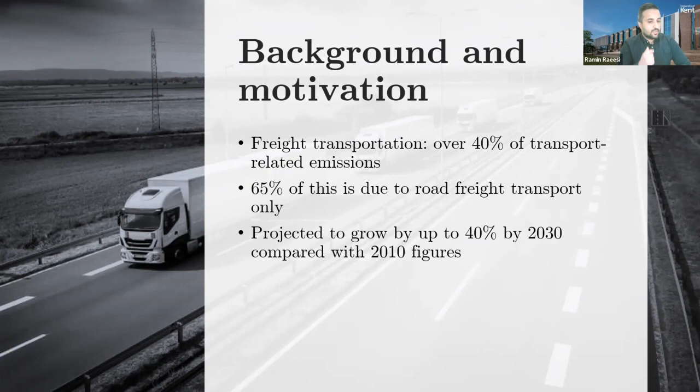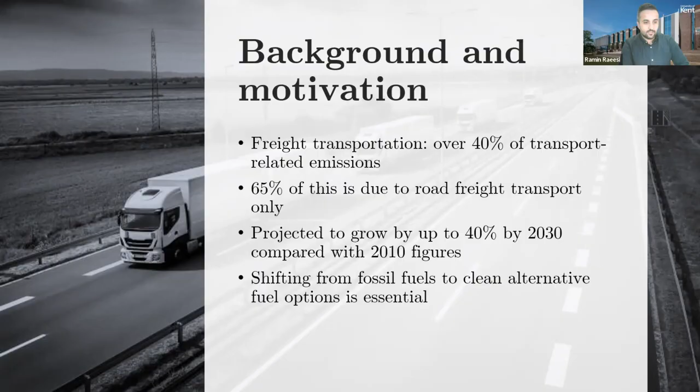I'll start with a little bit of background and motivation for carrying out such research. Freight transportation accounts for more than 40% of transport-related emissions, and 65% of that is due to road freight transportation alone, which is a really large figure. Between 1990 and 2010, heavy goods vehicle emissions increased by around 36%, and they are projected to grow by up to 40% by 2030. So shifting from fossil fuels to clean alternative fuel options such as hydrogen is an essential step in decarbonizing the road freight transportation sector, which has the lion's share of total emissions from the overall transport sector. But why hydrogen? And why not the other net zero options that we are all aware of?

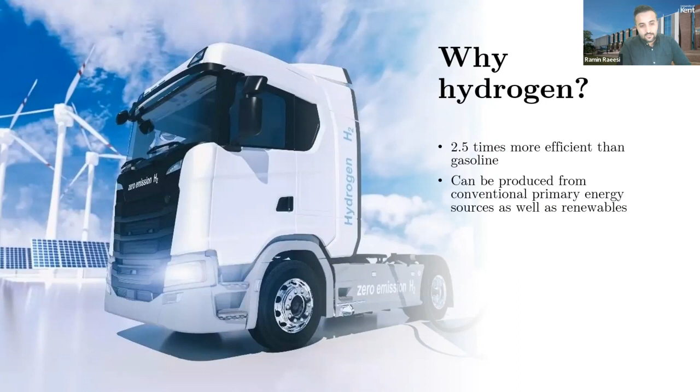There are a couple of reasons to go for hydrogen. For one thing, this is an energy carrier that is approximately 2.5 times more efficient than gasoline. It can be produced from conventional primary energy sources such as natural gas, coal, petroleum, as well as renewable energies like solar, wind, and tidal energy. And because of that, it contributes to the hot topic of energy security that we are facing today as well. So it's not just about net zero, but also about energy security. By moving towards hydrogen, we can become independent from the current situation happening in the world.

When we compare with other net zero options, such as electric commercial vehicles, hydrogen-powered trucks offer multiple competitive advantages, particularly in long-haul distribution. These pertain to their larger driving range, much faster refueling time — we know refueling and recharging time is an issue, for example, with electric vehicles — and improved payload efficiency. So while electric commercial vehicles are favored for last mile delivery and urban areas, they are not really applicable to long haul transportation.

And that's where hydrogen trucks play a very important role in the future of road freight transportation.

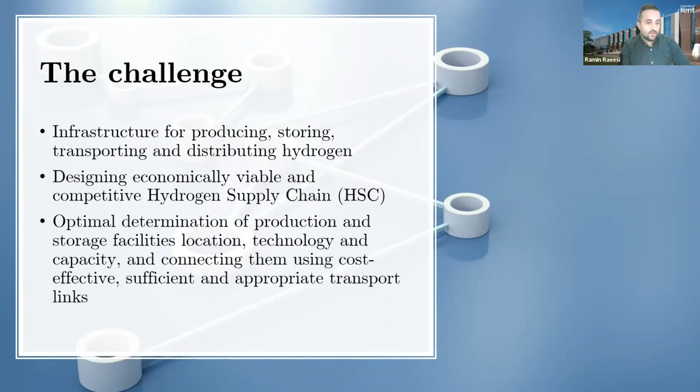What is the main challenge we were trying to address in this research? The most clear challenge facing a hydrogen economy for road freight transportation is the lack of infrastructure required for producing, storing, transporting, and distributing hydrogen. Designing an economically viable and competitive hydrogen supply chain to meet end user demand is not easy. The ultimate price of hydrogen at the pump relies on the optimal determination of production and storage facilities, their location, technology, capacity and size, the required capital investment and operational costs, and then connecting them using cost-effective, sufficient, and appropriate transport links.

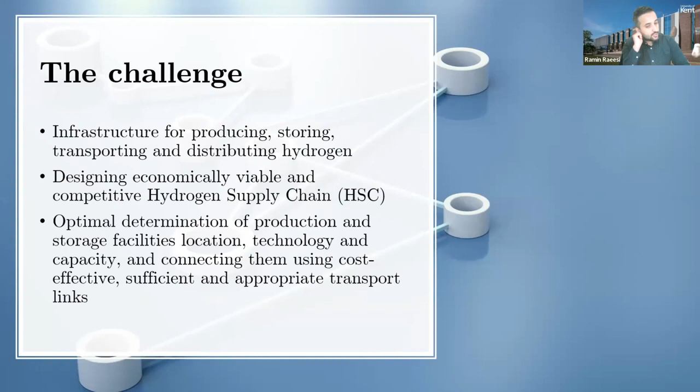So at the strategic level, this is the key challenge facing the hydrogen economy to fuel the road freight of the future: a gap in the existing hydrogen supply chain network design knowledge.

From this point on, I am using HSC to refer to hydrogen supply chain. There is actually good literature on hydrogen supply chain network design. These are mostly tools designed for optimal deployment of hydrogen infrastructure and strategic HSC design through spatially explicit optimization models that consider the entire hydrogen supply chain at a national or regional level. These models integrate multiple components of the hydrogen supply chain corresponding to production, storage, and transportation within a single optimization framework. The output is usually the number and location of required facilities with their adopted technology and size, as well as the transportation infrastructure needed, while minimizing the capital and operating costs of the HSC.

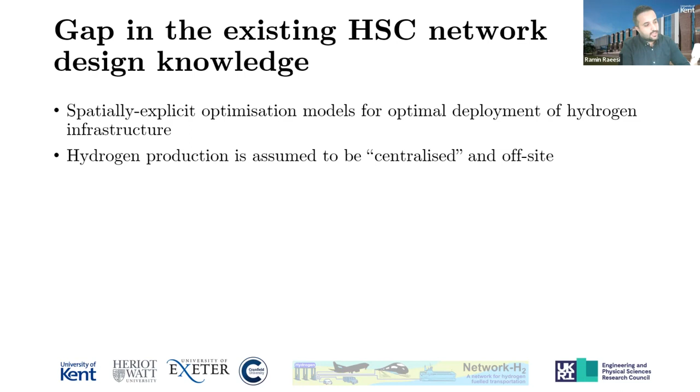One thing about most of these models is that they are mostly based on centralized hydrogen production. These are rather large hydrogen production sites, off-site from where hydrogen is needed, and most existing models in the literature are based on these centralized modeling tools. Interestingly, and ironically, the largest proportion of hydrogen supply chain cost is dominated by hydrogen storage, transport, and distribution, rather than hydrogen production itself.

This is an explicit finding from almost all studies that have used one of these tools. So when you produce hydrogen centrally, and then need to take it to where it is needed, let's say to the final point of delivery at a refueling station, you have to transport the produced hydrogen to a bulk storage site, and from that bulk storage site transport it again to the point of need. All of this transportation and storage is really costly in the overall hydrogen supply chain costs, and this is a gap in the existing hydrogen supply chain network knowledge.

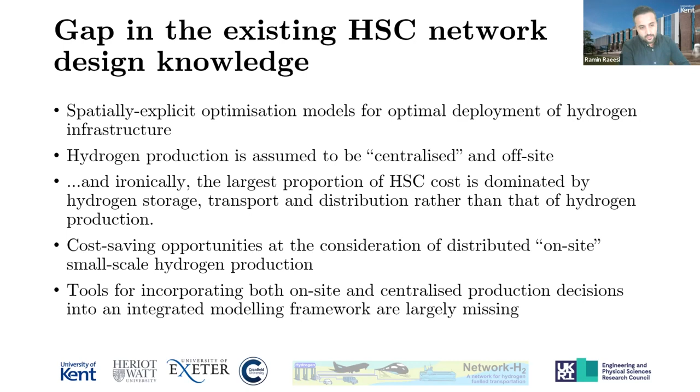There are studies specifically looking at on-site hydrogen production, but these focus only on on-site, small scale hydrogen production rather than seeing the entire picture. So where would it be best to produce hydrogen centrally, and where would it be best to produce and use hydrogen on site? The literature is either on the centralized side or the on-site side, with no research linking the two paradigms. Tools for incorporating both on-site and centralized production decisions into an integrated modeling framework are largely missing, and this was one of the first things we observed as we reviewed the pertinent literature in this area of research.

So the main project objectives and contributions: we aimed to build a techno-economic model for understanding the economics of hydrogen utilization for land-based freight transport in Great Britain. We wanted to develop a new hydrogen supply chain network design tool that integrates decisions on centralized and on-site hydrogen production simultaneously.

We also wanted to identify where potential hydrogen supply chain refueling stations for major heavy goods vehicle routes should be, including the location and size of refueling stations. And we intended to include all state-of-the-art blue and green hydrogen production and storage technologies, developing key insights on the economics of establishing a hydrogen supply chain to support the route of hydrogen HGVs.

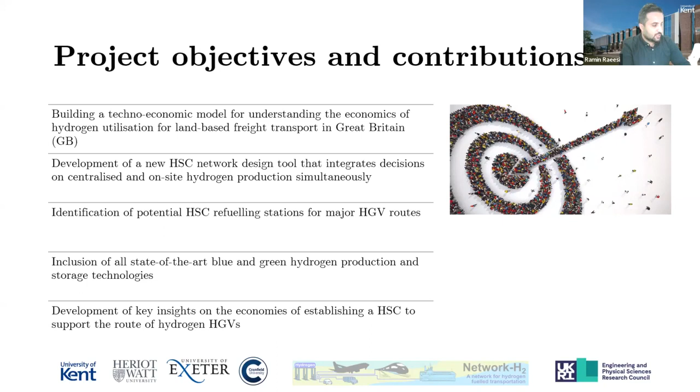The entire project was delivered over 3 work packages. In work package 1, we focused on model development and demand scenario generation.

As part of this work package, we tried to understand the potential demand for hydrogen from the future hydrogen-powered truck fleet. We wanted to see how this demand is potentially distributed, what would be the potential location of hydrogen refueling stations, and what would be the size of each refueling station in the network at a strategic level. Of course, there are much further details to refueling stations, and the Athena project, which will be presented after this, paid a lot more attention to this aspect of the work.

Following this work package, we also developed supply scenarios for hydrogen production, hydrogen storage, and transportation. Finally, over WP3, all of these scenarios that were generated were exercised against the model developed as part of WP1, and the work package was focused on techno-economic scenario analysis.

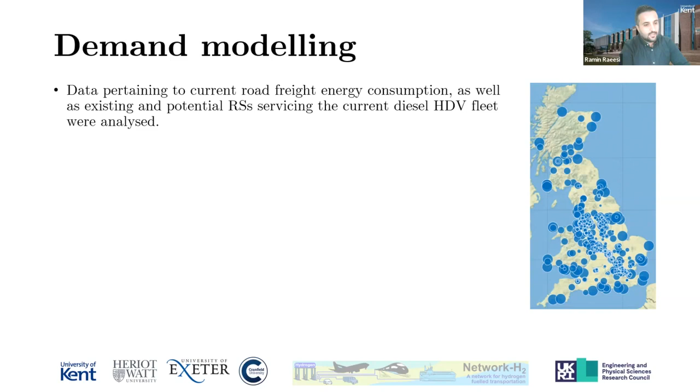So a little bit about different aspects of the work, starting with demand modeling. We started with collecting data pertaining to current road freight energy consumption, as well as existing refueling stations servicing the current diesel HDV fleet.

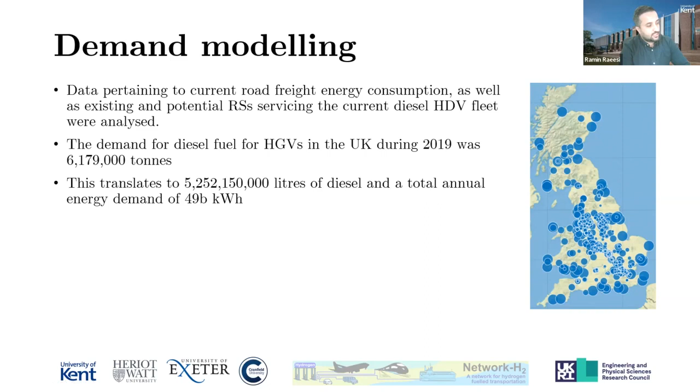We used data from 2019 mainly to bypass the effect of COVID, and using the data, we realized that the demand for diesel fuel for HGVs in the UK during 2019 was over 6 million tons. This translates to over 5 billion liters of diesel and a total annual energy demand of over 49 billion kilowatt hours, which is huge.

So if we assume the same figures remain as they are and taken to year 2050, when the net zero ambitions of the government have to be met, and assuming the entire HGV fleet is converted to hydrogen, then this is how much hydrogen we need: 49 billion kilowatt hours a year.

We also collected data on existing refueling facilities. These consisted of over 1,700 records of warehouse facilities, around 300 service stations, and over 50 ports, and all of them were consolidated and combined to create a final set of 539 records of candidate facilities for hydrogen refueling stations.

In terms of the size and capacity of these refueling stations, we used data where it was available. When we had incomplete information, we conjectured from, for example, the size of the warehouse, what the potential size of the refueling station shall be.

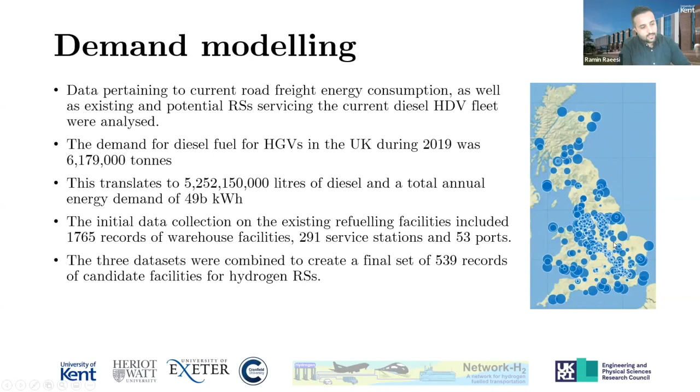So this is a representation of where refueling stations are located within Great Britain, and the size of each circle here shows the capacity of this particular refueling station.

In terms of hydrogen production technologies, we tried to include state-of-the-art blue and green hydrogen production technologies. We considered three blue hydrogen production technologies corresponding to steam methane reformer with carbon capture, usage, and storage; autothermal reformer with carbon capture and storage; and autothermal reformer with gas-heated reformer with carbon capture, usage, and storage.

And in terms of green hydrogen production, we considered alkaline electrolysis, proton exchange membrane electrolysis, and solid oxide electrolysis. Some of these technologies, like SOE and ATR plus GHR, are still not operationalized, but based on the data we used from BEIS, they are expected to be cost effective for hydrogen production by 2030. So we still included them in the study because we had a look-ahead analysis of the future hydrogen economy in this study.

We collected all the data regarding the different plant outputs, the minimum production capacity of these outputs for them to be operationalized, their maximum production capacity per day, capital cost involved over different years as was reported in the BEIS report, and also the unit production cost. So all of these were collected.

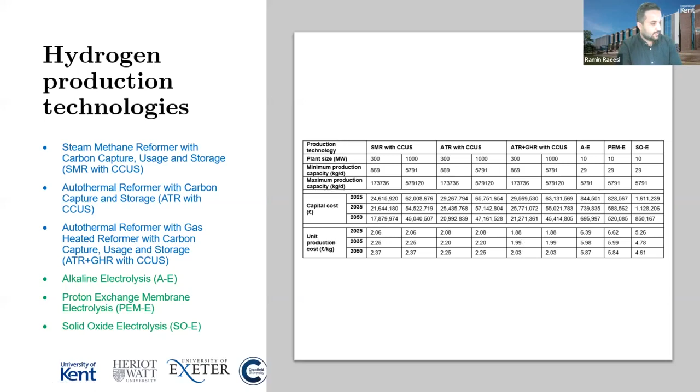We also collected some data on existing or planned hydrogen production sites in Great Britain. We divided the entire region of GB into 34 different grid structures, and within each grid, we could identify whether there is any existing or planned hydrogen production site.

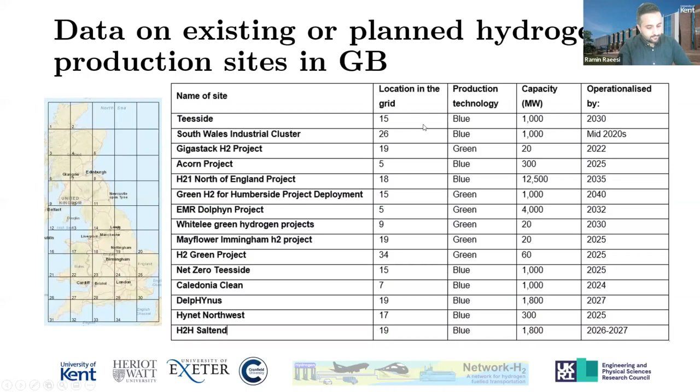In terms of hydrogen storage technologies, we considered both underground and overground hydrogen storage technologies. For underground storage, we considered pipe storage, lined rock cavern, and salt caverns. And for overground, we considered compressed hydrogen gas tank at 70 MPa.

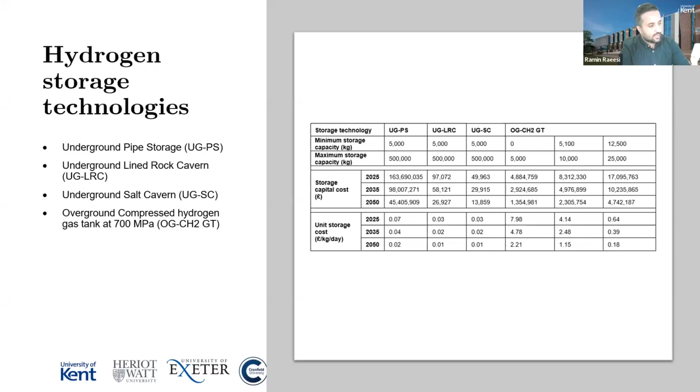Similar to the case of hydrogen production, we collected all required data on capital cost and unit storage cost. Again, for hydrogen storage, we tried to identify existing sites for underground hydrogen storage, and we mapped them to the grid structure that we developed.

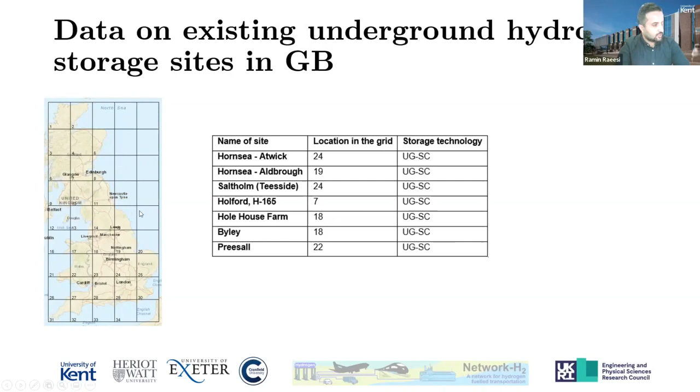For transporting hydrogen from where it is produced to where it is stored and then delivered, we considered only one mode of transportation: tube trailers, which carry hydrogen in its gaseous format, CH2. We excluded other means of transportation between supply chain entities, like pipeline networks, for two reasons. For one, for the considered case of road freight refueling, tube trailers make the best sense based on our analysis of existing knowledge in the literature. On top of that, given the duration of the project and access to data, it was very difficult to include data on the pipeline network in the country, so we had to exclude that and only relied on tube trailers.

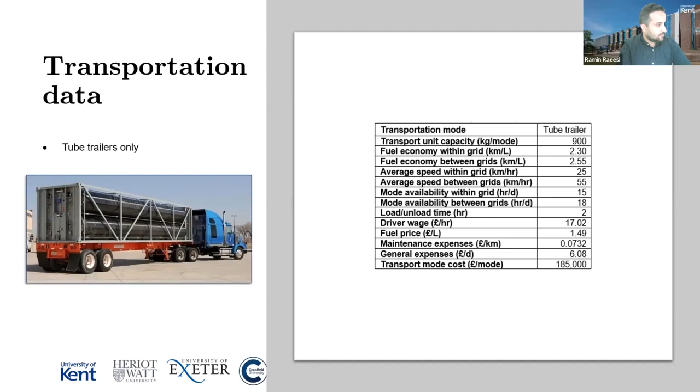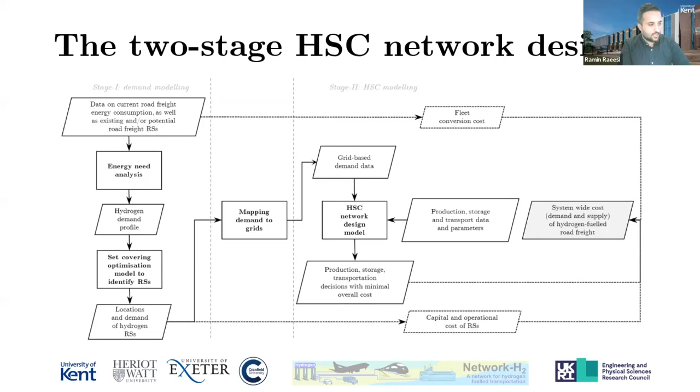We developed a modeling tool which intakes all of this data and in the background runs two different mathematical optimization models to understand which refueling stations to open, which production sites of what size and technology shall be open in which grids, how hydrogen is transported, and at which hydrogen refueling station sites it would be best to produce hydrogen on site rather than getting it from centralized production. These two tools - a set covering optimization model to identify refueling station sizes and locations, and the hydrogen supply chain network design model - take all the data I referred to and output the optimal design of the supply chain based on both centralized and on-site hydrogen production.

So the techno-economic scenarios that we considered to exercise against this two-stage modeling tool were 11 different scenarios. We started with a baseline scenario, SC0. In this scenario, we left the model to decide whether on-site or centralized hydrogen production should be established, so the model can freely decide. We assume the entire HGV fleet in the UK is converted into hydrogen. We allow the model to decide whether to go with blue or green hydrogen, and we let the model freely decide whether existing identified sites for hydrogen be used as part of the hydrogen supply chain for road freight or not. We planned for the year 2050, so all the cost figures used were for this year.

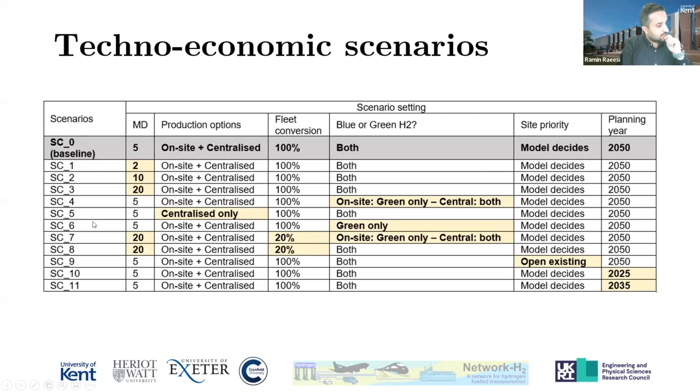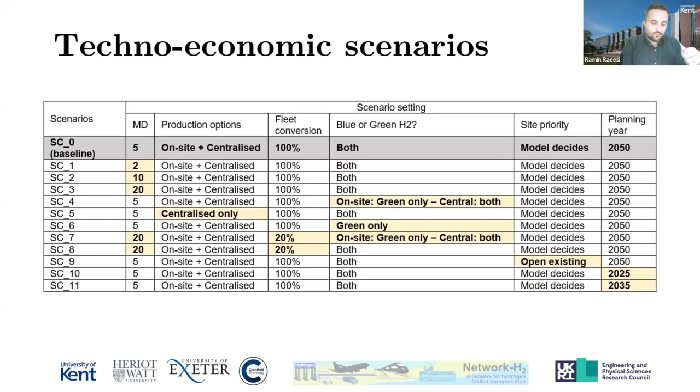The other scenarios change one or several aspects of the baseline scenario. For example, in scenario 5, which opposes what we developed as part of this study to what exists in the literature, we just rely on centralized production and ignore on-site hydrogen production, to see what happens and how much cost we are saving with the developed tool. Or, for example, here we turned off the blue hydrogen production option, so green hydrogen production only, to see what it costs to just produce green hydrogen for road freight, and so on. All these configurations were exercised against the modeling tool.

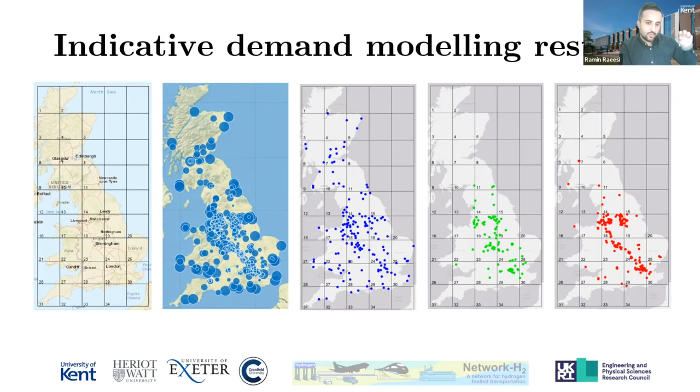I'll skip this one - it just represents the sites that were opened and those potentially ready for passing to the next stage for on-site or centralized hydrogen production. As you can see, this is the total sites we identified as a candidate list. These are those that have not been opened, and the blue and green ones are opened ones. Blue ones show the potential for on-site small-scale blue hydrogen production, and green ones show on-site small-scale green hydrogen production opportunities. But this is not yet decided, and it is passed to the second stage, which decides whether to establish on-site or go with centralized hydrogen production.

So that is what we ultimately get, and we can design the entire supply chain to address what is demanded by the fleet. Just a couple of interesting figures and what we have achieved with the modeling tool that was developed as part of this. So as I mentioned, in the baseline scenario, we allow decisions to be centralized or on-site freely. But in scenario 5, we force the model to just go with centralized, what is existing in the literature.

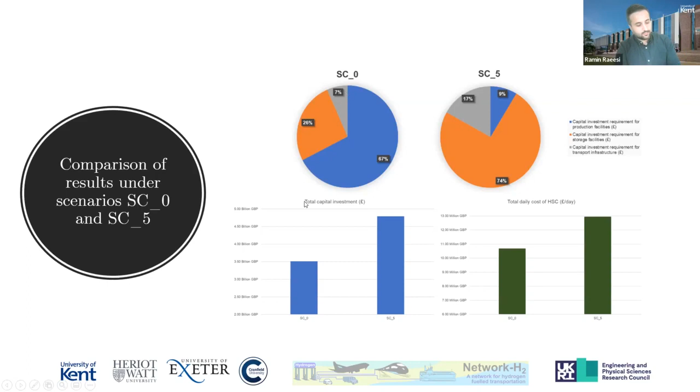So very quickly, some interesting insights from our optimization analysis. We noticed that with a total capital investment of 3.5 billion, the required hydrogen supply chain network to fuel the road freight of the future can be established. I personally believe that is not super huge, but what makes the situation very difficult is the other side of the picture, which is converting the heavy duty fleet into hydrogen-powered HDVs. This requires around 400 billion investment commitment from freight forwarders. And this figure is very huge and requires a lot of commitment from freight forwarders and a lot of funding support from the government as well.

This is in case we want to convert 100% of the fleet to hydrogen-powered trucks. But if we just want to convert 20% by the year 2050, we need less than £1 billion in capital investment for developing the infrastructure needed, but still £80 billion for enticing the companies to invest and convert 20% of their fleet. So still this figure is huge. And I think one of the findings of this study was that instead of focusing too much on the infrastructure side and forgetting about the demand side, this partially addresses the chicken and egg situation, which we are always facing, whether we should first develop the infrastructure or first create the demand. I think in the case of hydrogen, definitely the infrastructure should precede.

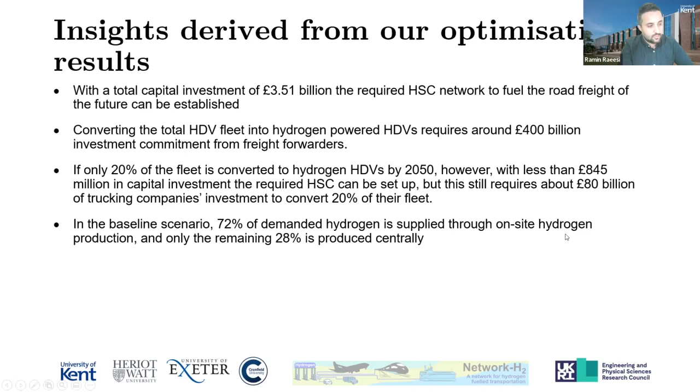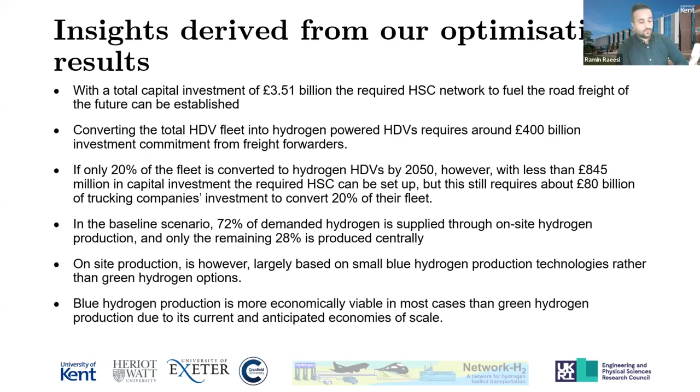In the baseline scenario, 72% of demanded hydrogen is supplied through on-site hydrogen. So we should be more serious with on-site hydrogen, and where possible, this should be established because it reduces lots of costs corresponding to storage and transportation. We find that most on-site hydrogen production is based on small blue hydrogen production technologies though. So this is not the best thing, but this is because green hydrogen production is still very expensive.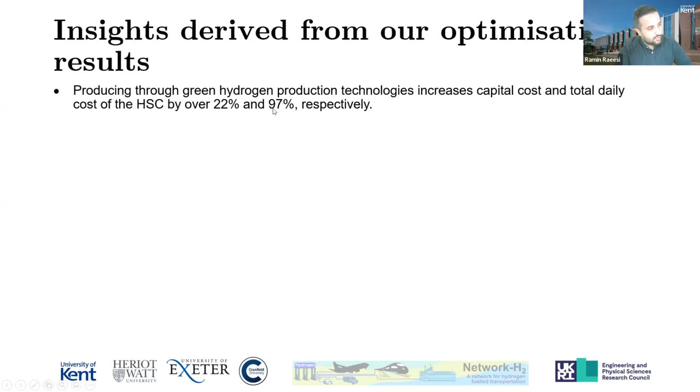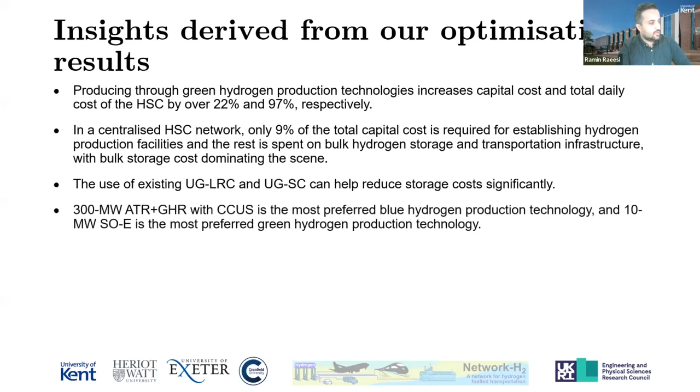If we insist on going fully green in hydrogen production for road freight, we increase capital costs by 22%, which is not huge, but then daily cost increases so much it becomes almost double. These are other things about the best preferred kind of hydrogen production technology and storage technology, which I skipped. Just a very brief indication of potential next steps.

I think it is very important to carry out a next study on multimodal shared hydrogen refueling infrastructure, because at the end of the day, all modes of transportation will use hydrogen refueling stations at certain points, like ports. So ports are key here. They can satisfy part of the maritime need as well as the road need. And most of our HGV routes start from the port. So this is a very interesting and important next stage project. Other things like inclusion of pipelines, which we were unable to consider as part of this study, would be interesting to explore further based on the existing infrastructure in the country.